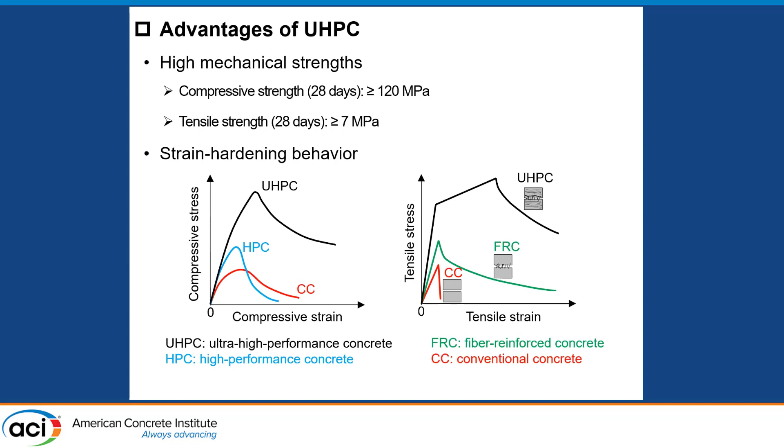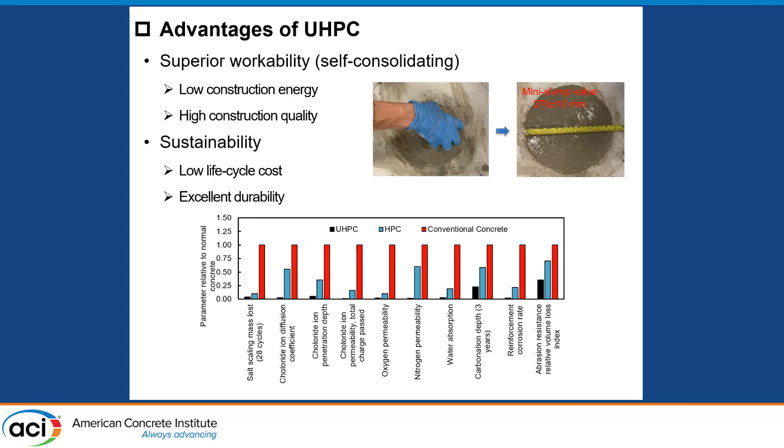Compared with high performance concrete and conventional concrete, UHPC has strain hardening behaviors as shown in the attached figures. Due to its superior workability, or self-consolidation properties, UHPC generally requires very low construction energy to achieve very high construction quality. Fourthly, UHPC has very good sustainability due to its low life cycle cost and excellent durability.

But we still have some challenges in the lab for large-scale UHPC production. As shown in the figures, sometimes the mixer might stop due to overload of the mixer engine during large-scale UHPC production with a normal mixer in the lab.

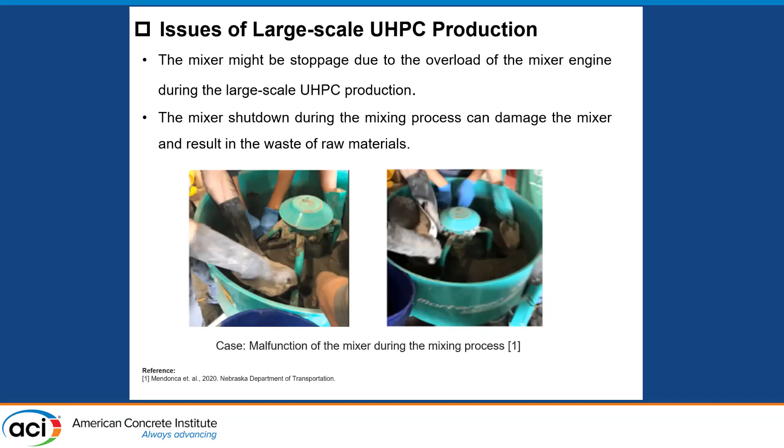If the mixer is shut down during the mixing process, it might damage the mixer engine, or the raw materials will be dumped. That's not what we want.

For now, the students and researchers in the lab are trying to minimize the malfunction possibility. We prefer to use ice water together with reducing the mixing volume.

Here we reviewed some reports from other DOTs. We can see the output capacity of the mixer is significantly higher than the allowable volume, in order not to damage the mixer. But the existing solutions still have some limitations.

The extremely low mixing volume will significantly reduce UHPC production efficiency, and the cost and construction time for each UHPC element will be significantly increased.

So what is the reason the mixer will be shut down? We can see in this figure that compared with conventional concrete, the peak mixing torque for UHPC is much higher. If the peak torque exceeds the limitation of the mixer, the engine will be shut down.

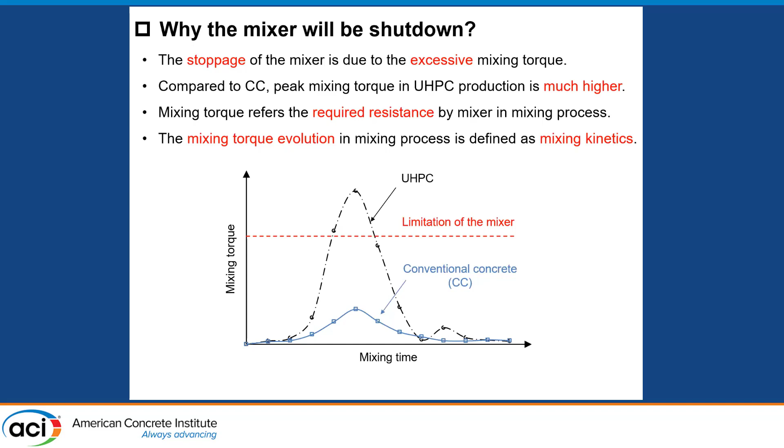In this figure, the mixing torque refers to the required resistance by the mixer during the mixing process. The mixing torque evolution during the whole mixing process, we define as the mixing kinetics in this research.

So why is UHPC different from conventional concrete? It's hard to mix. Before talking about this, let me briefly introduce the mixing process for concrete materials. The mixing process can be generally divided into 5 stages.

We call them wetting, nucleation, consolidation, growth, and homogenization. In the wetting and nucleation stages, the liquid materials like water and superplasticizer are absorbed into the granulars. The consolidation and growth stages will start when the surface of the granulars become wet.

The water to wet the surface of the granulars has 2 sources. The first is the extra water in the mixture design, for example a mixture design with very high water-to-binder ratio. The second is water squeezed from the inside of the granulars.

But as we all know, due to the extremely low water-to-binder ratio, for UHPC the water to wet the surface can only come from the inside of the granulars. That leads to UHPC taking longer time and being harder to homogenize.

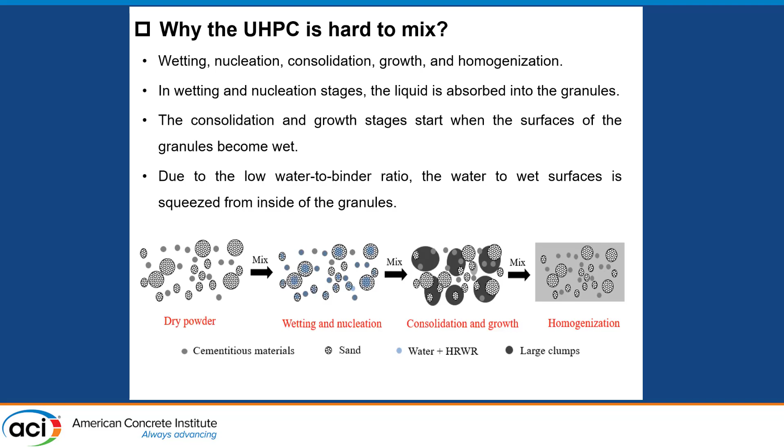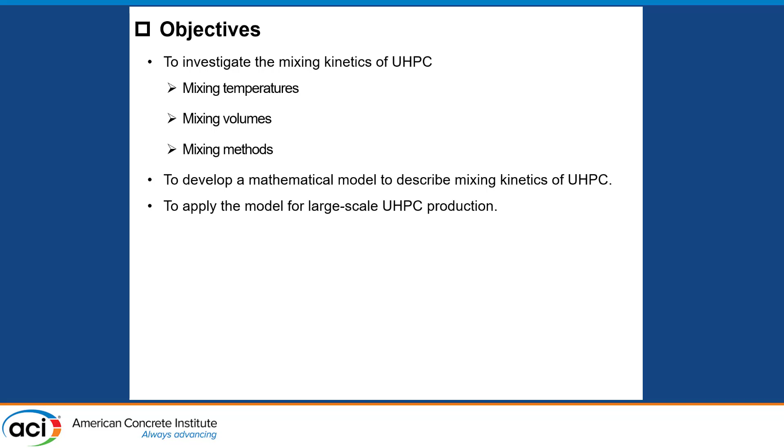In this research, we investigate the mixing kinetics of UHPC, looking at 3 impact factors: mixing temperature, mixing volume, and mixing method. After that, we develop a mathematical model to describe the mixing kinetics of UHPC, and finally apply the model to guide our large-scale UHPC production in the lab with a normal mixer.

Firstly, to quantitatively evaluate the mixing torque during the mixing process, the ICAR plus rheometer is used in this test. As shown in the figure at bottom right, the mixing torque is tested every 30 seconds after water is added into the mixer.

The first step, we conduct preliminary studies. We can see the dramatic mixing torque variation occurs in stage 1. That's when we see the mortar homogenization process.

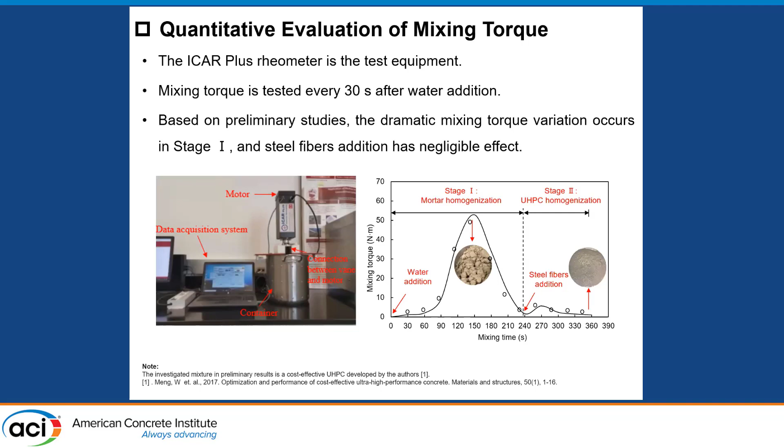The addition of steel fiber has negligible effect on the evolution of the mixing torque. So in this research, we mainly focus on stage 1 to figure out what happened.

First is the mixing temperature, second is the mixing volume. And for the mixing method, 2 types of mixing method will be investigated in this research. We call it the mono-batching and the multi-batching method.

The mono-batching method refers to adding all the dry raw materials and the water materials into the mixer at the same time, then starting the mixer to homogenize the UHPC.

For the multi-batching method, here we use the 2-batching method as an example. In the first round, we just add half of the water, superplasticizer, and dry materials into the mixer and make sure it mixes. Then we add the other half of the dry materials and liquid materials into the mixer.

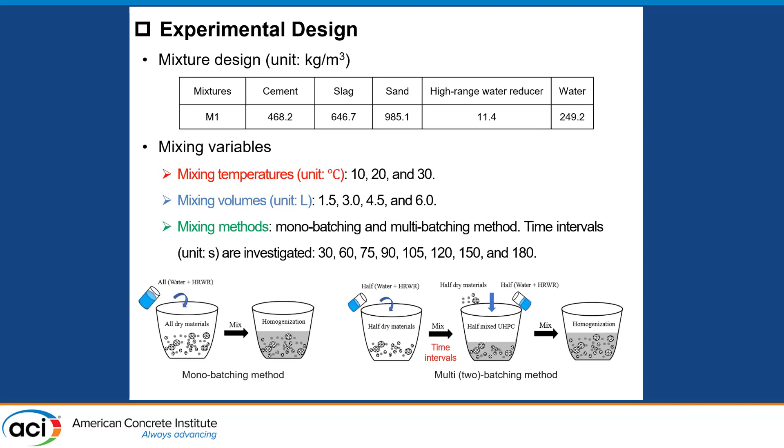The interval time between these 2 batches was also investigated. So let's see the effect of...

Mixing temperature and volume on the mixing torque. Before I introduce this slide, I will explain the label of the figure. The M1 represents the M1 mixture, 1.5 represents the mixing volume is 1.5 liters, and 10C represents the mixing temperature is 10 degrees.

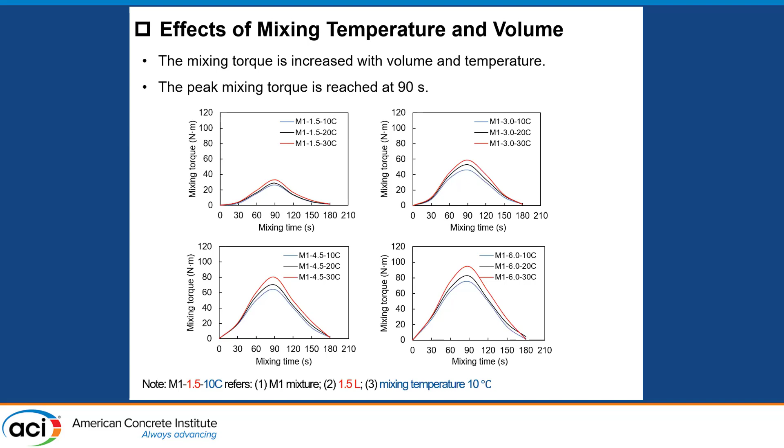From this picture, we can see that mixing torque increases with the mixing volume and temperature, which is very clear. The peak mixing torque is reached at 90 seconds.

After that, we conduct a regression analysis for the peak mixing torque. We can see the peak mixing torque linearly increases with the mixing temperature and the mixing volume. In these 2 figures, the slope of the fitting line represents the increasing rate of the mixing torque. We can clearly see that the peak mixing torque is more sensitive to the mixing volume compared with the mixing temperature.

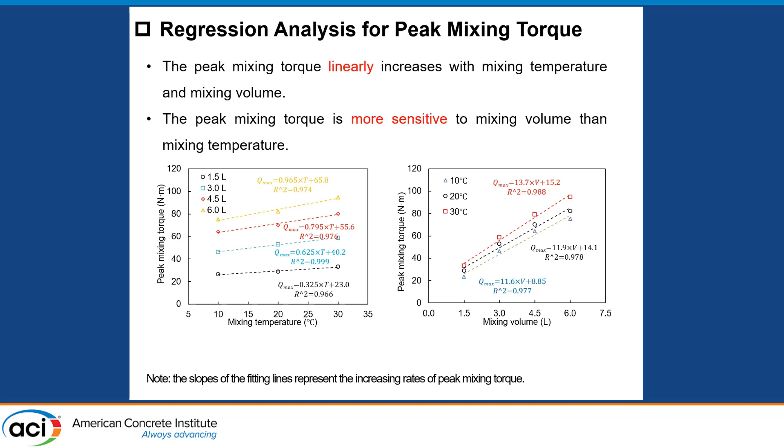So next, let's see the effect of mixing method and time intervals on the evolution of the mixing torque during the mixing process.

Let me introduce the name of the label in this figure. M1 also represents the M1 mixture. The first 1.5 represents that the first 1.5 liters is added at 0 seconds, and the second 1.5 liters was added at 180 seconds. The 20C represents mixing temperature is 20 degrees.

We can see that as the interval time between the 2 sub-batches is sufficient, which in this research is over 90 seconds, 2 peaks of the mixing torque are generated. Compared with the mono-batching method, the peak mixing torque of the 2-batching method is significantly reduced.

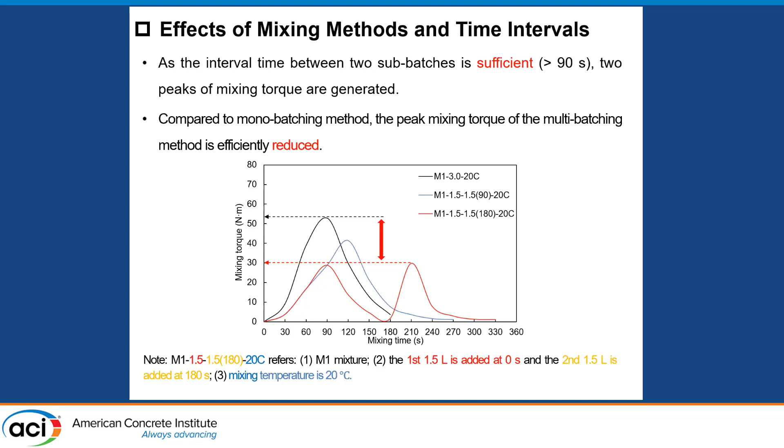After that, we want to know if there is any difference between the first sub-batch and the second sub-batch. From the results here, we can see the second sub-batch actually takes shorter time to reach homogenization, and the peak mixing torque of the second sub-batch is pretty close to the first one.

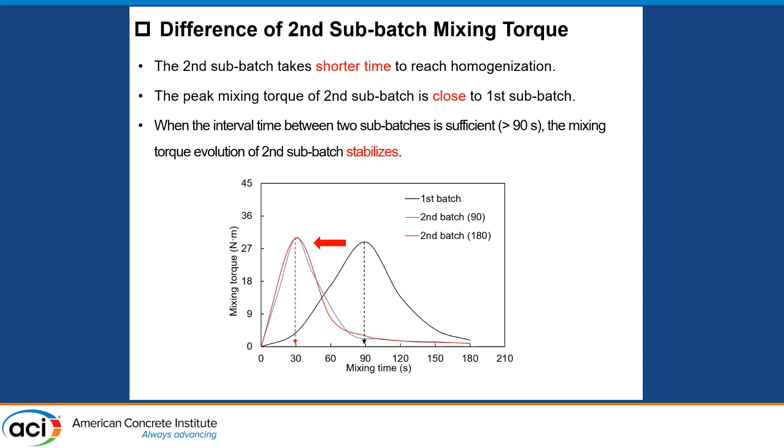The third conclusion is the same as before: when the interval time between the 2 sub-batches is sufficient, the mixing torque evolution of the second batch will stabilize. You can see we conducted tests at 90 seconds and 180 seconds. So what is the reason the second sub-batch takes shorter time?

For the mono-batch method, as we introduced before, due to the low water to binder ratio, consolidation can happen, and the consolidation and growth stage can happen only by the water squeezed from the inside of granulars.

But for the multi-batch method, we can see the mixing process for the first sub-batch is the same, which will rely on the water squeezed from the inside of granulars. But for the second sub-batch, the extra water from the homogenized first sub-batch can help wet the surface of the second sub-batch.

That's why it takes shorter time for the second sub-batch to reach homogenization, and also it can reduce the mixing torque.

After we conducted so many results, we found a similar regularity. From the first figure, we can see the mixing torque generally increases, decreases, and stabilizes with mixing time, which is very similar to a Gaussian distribution curve. The mixing torque also increases with the mixing temperature and mixing volume.

So we propose a model to try to describe the mixing kinetics of UHPC during the mixing process. The constants A, B, C, alpha, and beta can be determined through regression analysis using some small lab scale tests.

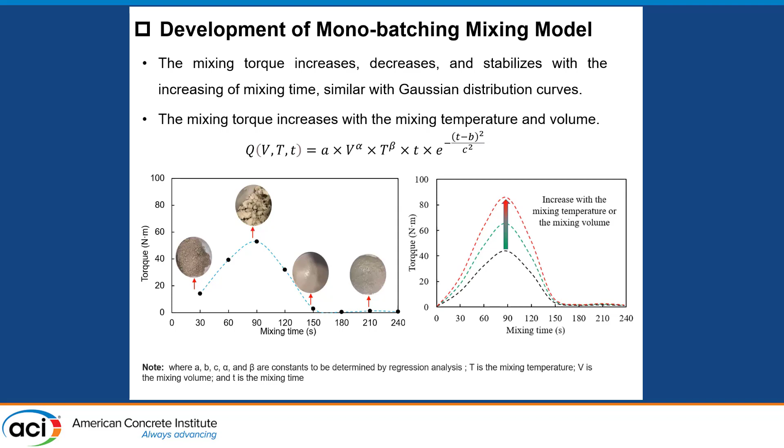First, let's try to verify the mono-batching model. The regression analysis was conducted to determine the mono-batching constants using the experiment data. In the results, we can see the test results are shown in solid lines and prediction results are shown in dashed lines.

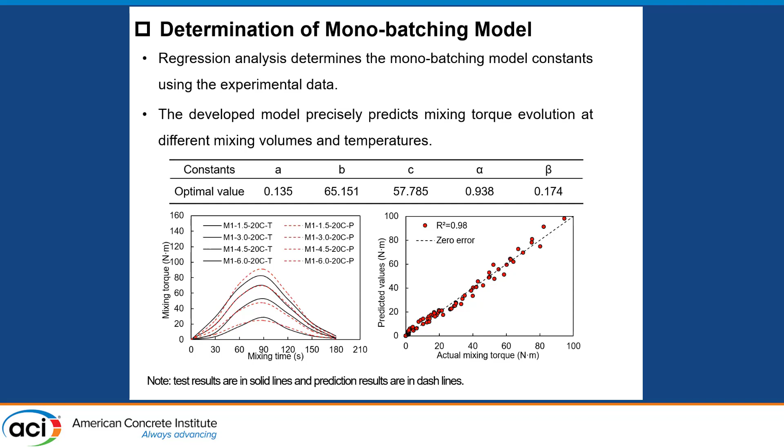So we can see the developed model can precisely predict the mixing torque evolution at different volumes and different temperatures. And the second one, we're trying to develop the multi-batch mixing model.

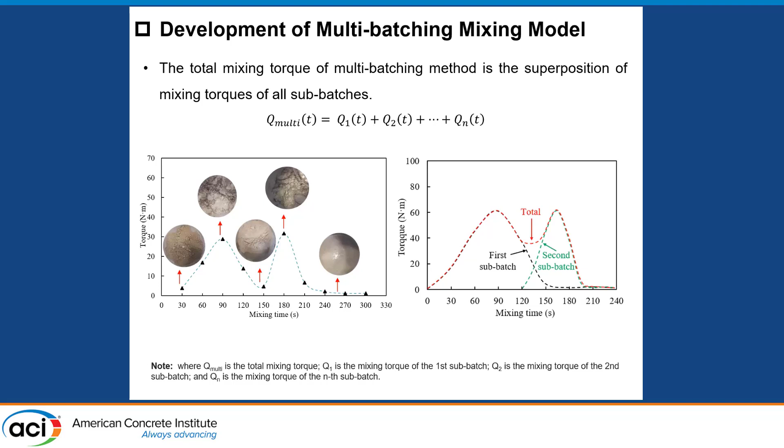The multi-batching total mixing torque is just the superposition of the mixing torques of the different sub-batches. We just need to get the constant for different sub-batches and do the superposition, then we can construct the model for the multi-batching.

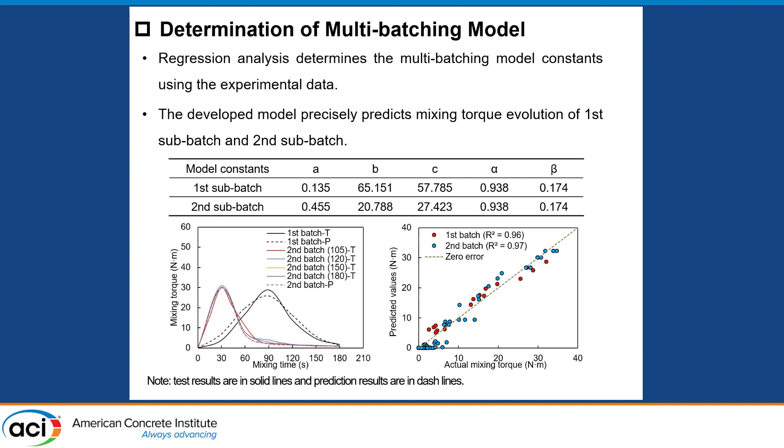Here we can see the same as before. The test results are in solid lines and prediction results are in dashed lines. We can see the developed models can precisely predict the mixing torque for the first sub-batch and second sub-batch. After we do the superposition, we can construct the model for the multi-batching method.

After we get that result, we started thinking if our model just applies for our mixture instead of others. So we're trying to verify the model through different UHPC mixtures. Based on that, 3 additional UHPC mixtures are proposed. For mixtures M2 and M3, we use a viscosity modifying agent to vary the viscosity of the mixture, and for mixture M4, we totally change the binder component.

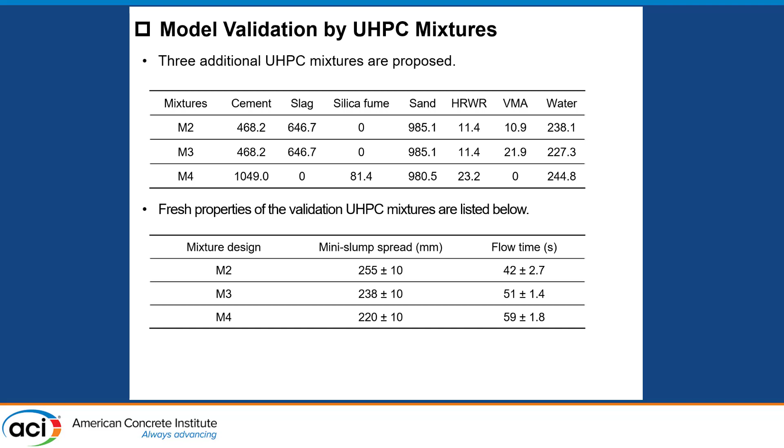So we can see here the fresh properties of the validation UHPC mixtures are in the table below. Then we conduct the results. Through the results, we can see, although the model constant for different types of UHPC mixtures are different, the mixing kinetics model can still work well for different mixtures.

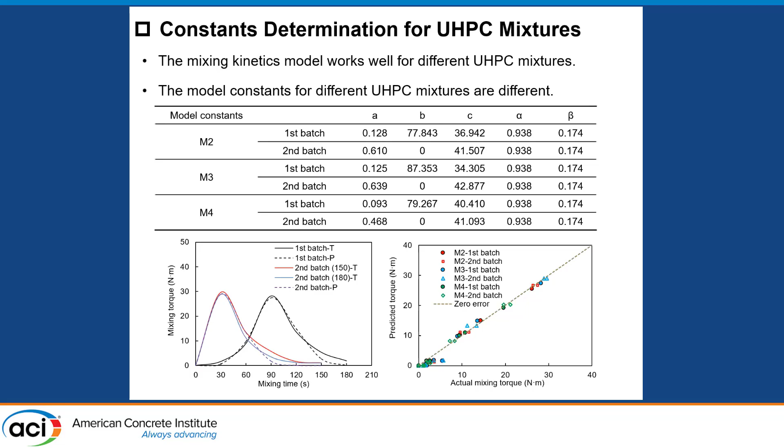You need to conduct some small batch tests to do the regression analysis and construct the model. Then after that, we started thinking about another problem: if the model can apply for different mixing methods.

And here is the constant determination for the mixing method. We can see it's very similar with the different mixtures. We can see the model constant for different sub-batches are different, but still the mixing kinetics model works well for the three-batch method as well.

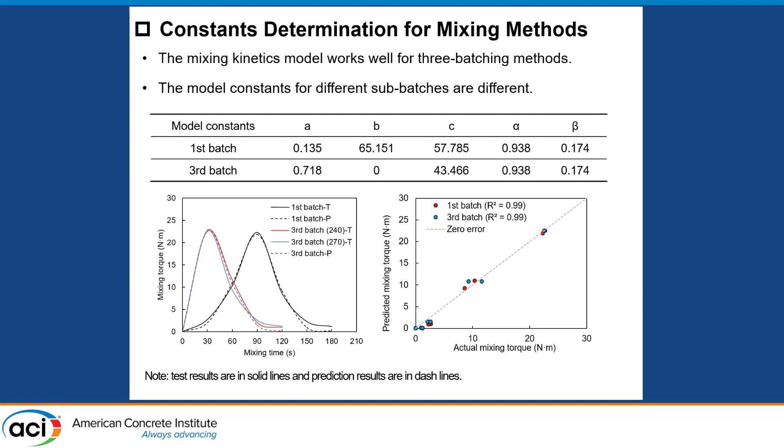After that, we're trying to think if the multi-batch method can affect the key properties of UHPC, because the method is totally different. So we conducted fresh properties, mechanical properties, compressive strength in this research, and the heat flow, hydration heat flow, and autogenous shrinkage tests. We can see compared with the mono-batch method, the multi-batch method has negligible effect on the key properties.

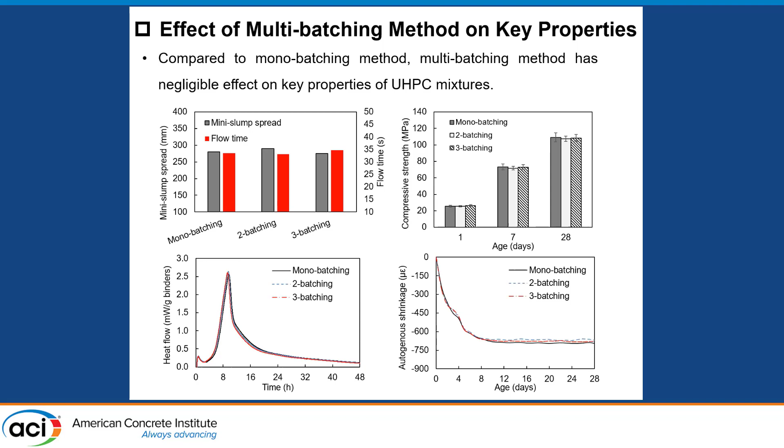So after all this work is done, we're trying to apply the model to guide our large-scale mixing in the lab with some normal mixers, not the very high-tech mixers. So the first step, we determine the UHPC mixtures in our lab.

This is the mixture we're trying to do the large mixing with. Step 2, we're trying to determine the model constant. I already showed the constant in the former slides, and we will have the constant for the mono-batching, 2-batching, and 3-batching as well.

Step 3, we need to calculate the peak mixing torque with different methods. In this step, we need the constant we already conducted in step 2, and we need to determine our target mixing volume and the mixing temperature. In this project, we just do 4 cubic feet, which is around 115 liters, and the mixing temperature is around 25 degrees in the lab, since it's just a lab test.

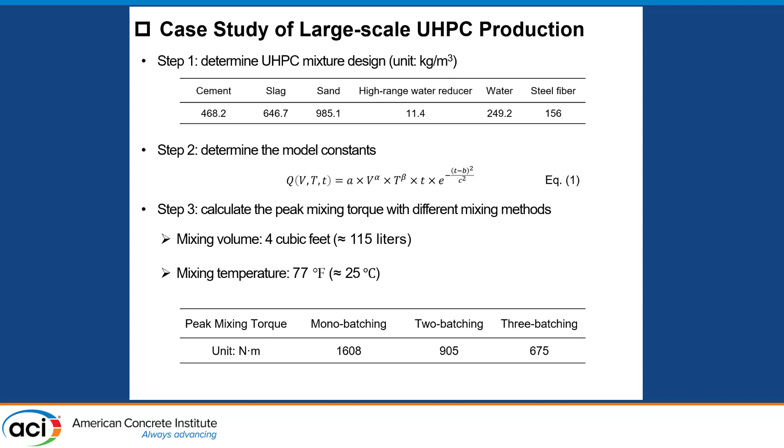And we can calculate the peak mixing torque for the different methods, which is 1,600 Newton meters for mono-batching, 905 Newton meters for 2-batching, and 675 Newton meters for 3-batching. Then step 4, we need to compare the peak mixing torque of the different mixing methods with the mixing capacity of the mixer.

Usually the manufacturer of the mixer will provide us the mixing power, or mixing capacity, which is horsepower or kilowatts, and they will also provide the rotation speed, which is RPM. Then we can calculate, in our lab, the limited mixing torque of the mixer, which is 990 Newton meters.

Then we can see, compared with the multi-batch method, the 2-batch method and 3-batch method. Although the 2-batch method is pretty close to the limitation of the mixer, due to safety concerns, we selected the 3-batch method in our research.

Let me show the results. We conducted 2 studies. This is when we use the mono-batch method - it got stuck, so the materials were wasted. Then we tried the 3-batch method with the same volumes and mixture, and it worked well.

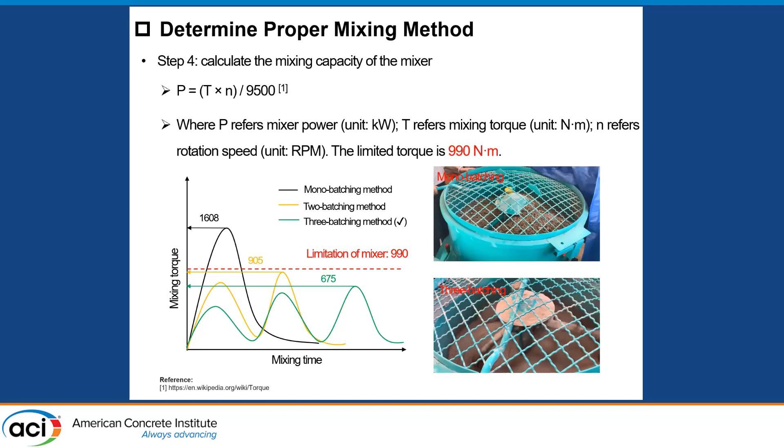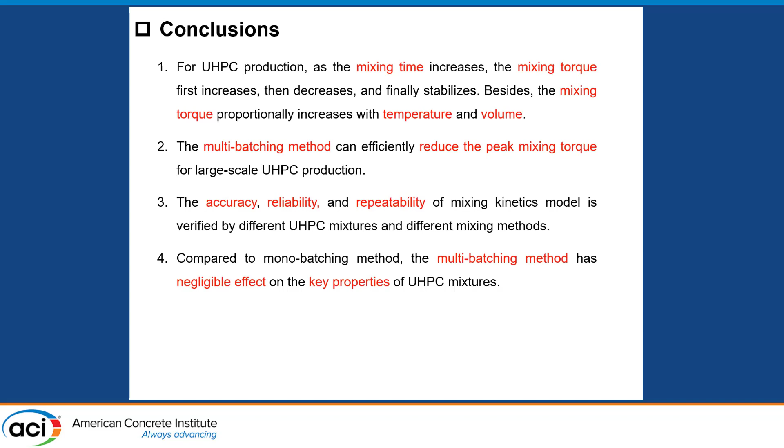Fourthly, compared with the mono-batch method, the multi-batch method has negligible effect on the key properties.

All the tests were conducted in our lab, the ACT lab. Our lab is on the riverside of the Hudson River, facing midtown Manhattan. So welcome to visit our lab.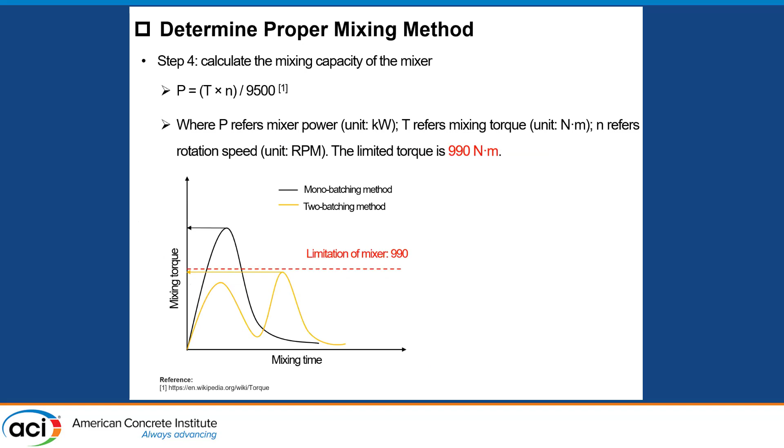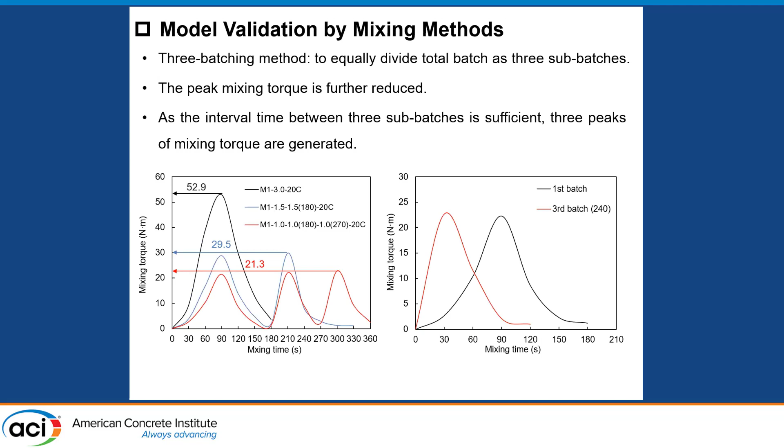So I understand the question - you mean this slide? Let me go back. You mean why for the second batch we have the extra water? Actually, that's not extra water. I think you're asking about this slide - this one, right? The extra water from this one - actually we don't add extra water, because when we add the second sub-batch, the first sub-batch is already homogenized, right?

We can regard the first sub-batch as, let's call it, viscous water, because it's already homogenized - it's not like dry materials. So that part of the first sub-batch can help with the dry materials from the second batch, which is just added into the mixture. That's why it can reduce the mixing time, and also it will not further increase the mixing torque, because they are already homogenized.

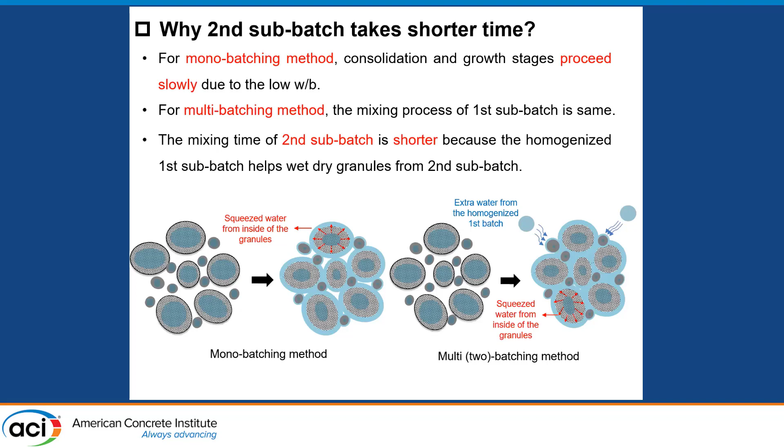There is also dry material when you are adding in the next batch, right? I'm sorry - on the second batch, when you are adding water, there are also dry materials, right? So the water content should be the same for mono-batching and multi-batching or 2-batching. So there should be some other reason that it takes less time, right?

Before we conduct the research, we will totally divide them into different sub-batches. For example, for the first sub-batch, we divide the dry materials half and half, and the water and superplasticizer we also divide half and half. So we mix the first one and the second one totally independently - they will not affect each other. Thank you for the question.

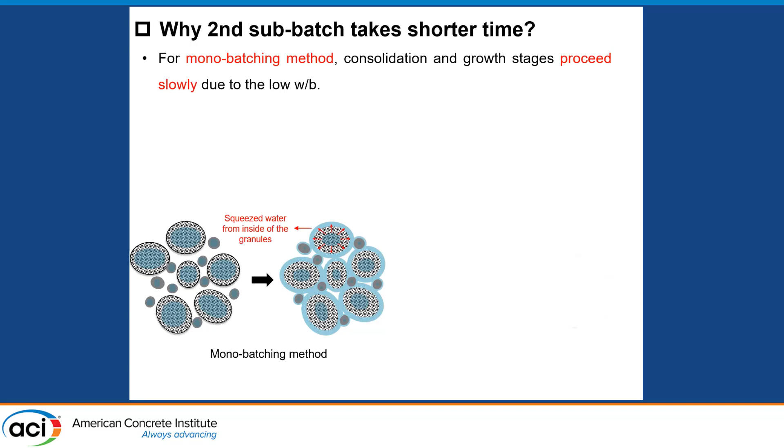Thank you for the great presentation. I want to ask, when you use multi-batch mixing, is it possible to increase the mix volume? You had the table in the beginning comparing the mix capacity and the allowable volume, I think - can you go back to the beginning? You had the table comparing the mix capacity and the allowable volume. So is it possible to produce a larger mix size with the same mixer when using multi-batches?